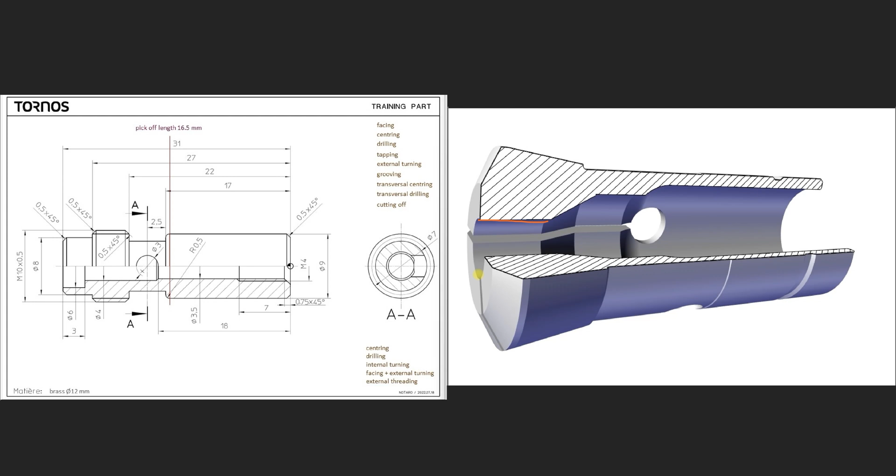Let's analyze the case presented in this right drawing. Here we have a bar already turned at some distance, and later the not turned length is left. This situation is correct because you see that all the time the bar is supported here. But we can imagine also a situation like in this drawing. Here the length of turned diameter is longer and a bar is retracted in that way that collet doesn't support a bar. This is a wrong case. We have to avoid it.

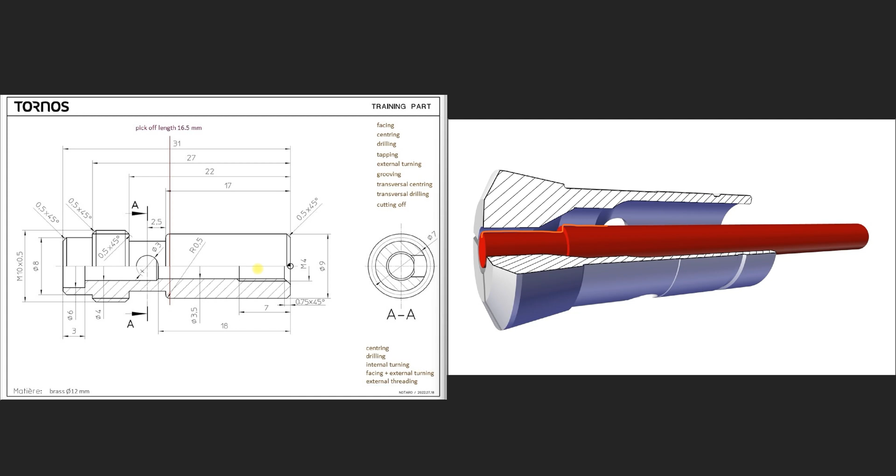We should keep this principle of supporting of a bar in guide bush, especially with operations with multi-passes. When a bar diameter is already turned, it shouldn't be retracted to a position like shown in this drawing that it isn't supported in collet. Returning to our drawing of our part, please notice that we have here in main operation a long hole, and it will be drilled in many passes. During this operation, a bar all the time should be supported. It means that it is necessary first to machine this hole and only after it make external contour.

But one remark: before we start machining of a hole, we will make facing first, not to have burrs inside. And of course, just after facing, we will make centering. We will use spotting tool to make here a chamfer. We need this chamfer to guide the drill and also for tapping operation. And centering will be followed by multipass drilling of diameter 3.5. We'll finish machining of this hole with tapping operation when an internal thread M4 will be done.

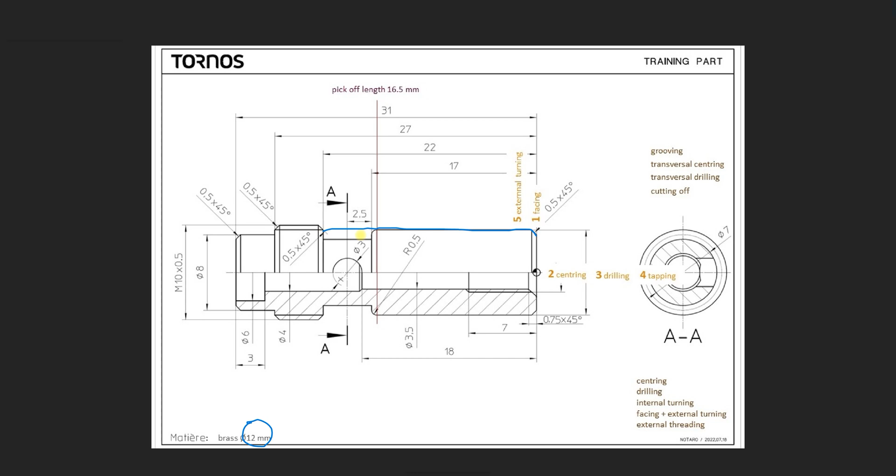Having the hole finished, we can deal with the external contour and turning it. First, please notice that our bar diameter is 12 and we have to turn it to diameter 9. We can make it in one pass without any retracting of a bar. That is why we can continue this turning till the end of the groove. And of course, grooving will be the next step. Within this operation, we will machine this round, groove, chamfer at the end and continue further.

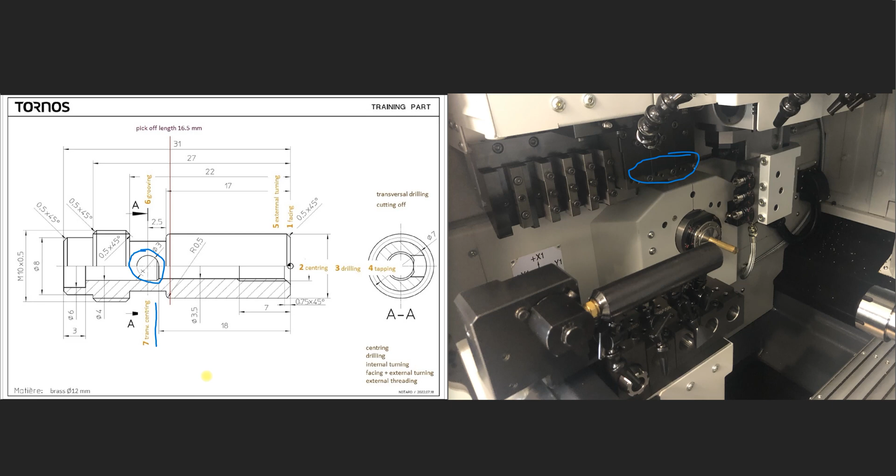We have a radial hole of diameter 3 on a groove. To do it, we need rotating holders; we have them in main operation here. Drilling will be executed on cylindrical surface, not flat. That is why we will start first with centering. And of course, next step will be drilling, transversal drilling. The last operation to execute in channel 1 is cutoff. It will be done when we finish machining in main spindle.

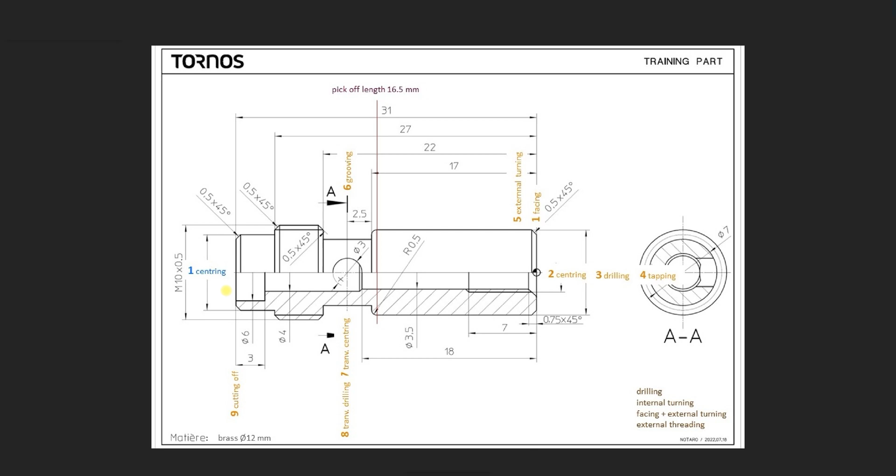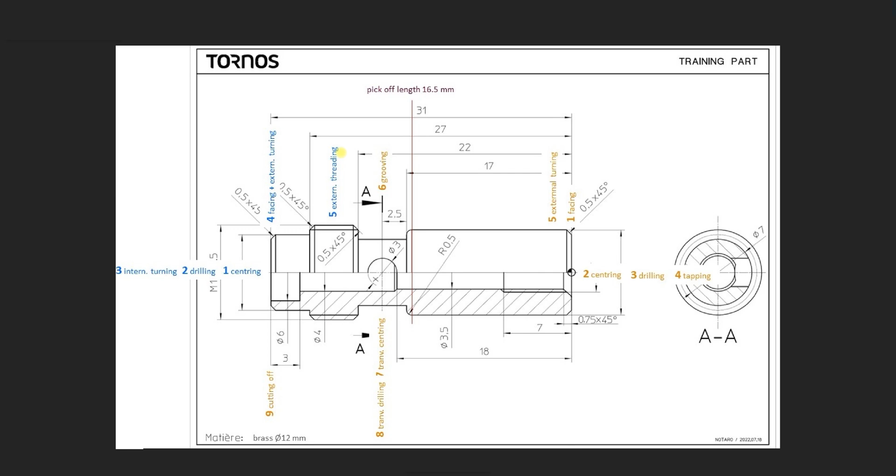Let's now focus on back operation. We will start machining with this hole, and our first operation will be centering. Next step, surely drilling of diameter 4. And the last step will be internal turning. We will turn here this diameter 6 and also make flat step here. We will continue with turning of external contour, this one, but first will be done facing and only after it external contour turning. We will finish our part with external threading executed in back operation.

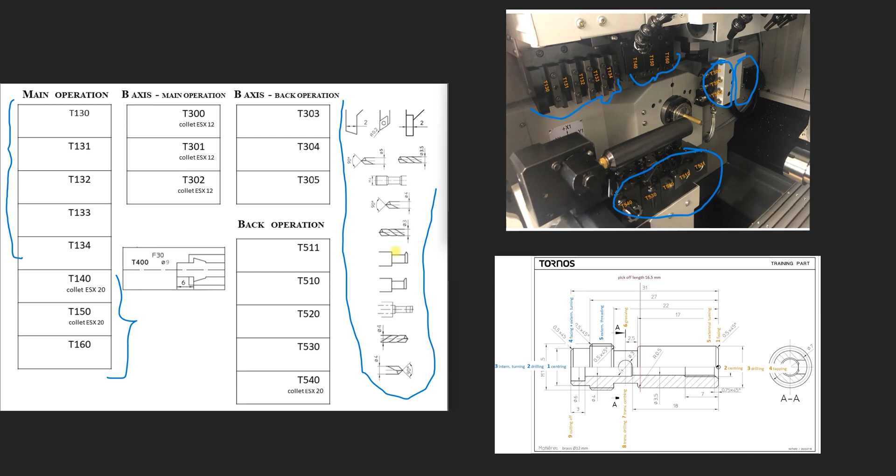Our task now is to assign each tool from this list to specific position on our machine. It is easy to assign cutoff tool because this tool has a fixed position on our DT26 HP machine. This is position T130. Please notice that when this tool is in the center of a bar, then this whole gang is retracted to the right. It makes free space for back spindle to approach safely for pickoff.

The other stationary transversal tools, I mean front turning and grooving, to assign in channel 1, will work one after one. That is why we will place them on adjacent positions to minimize the time of tool change.

Let us discuss now longitudinal tools assembled on B-axis to make a hole. Tapping tool should be placed on the top of B-axis because of better rigidity. And the other longitudinal tools, centering and drilling, should be placed in the order of their work. First will be centering tool, that is why it will be placed at the bottom, drilling tool in the middle, and as we said, tapping tool at the top.

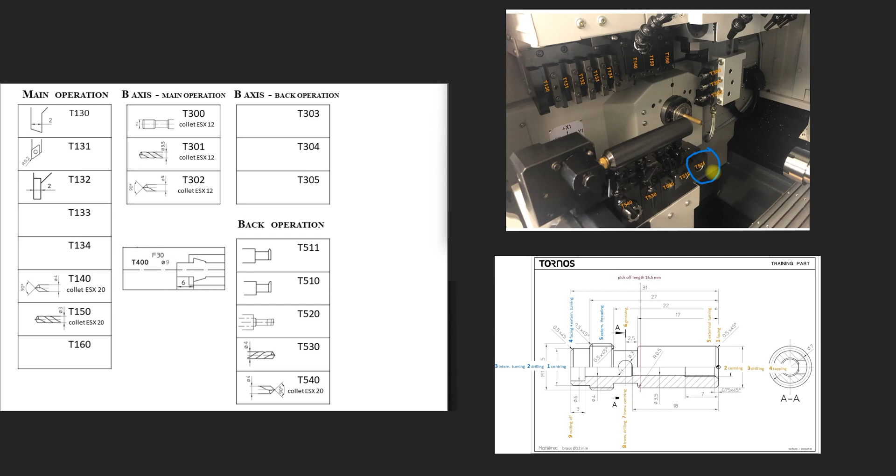At the end, we have to assign the last two tools to make external contour and external threading. First, let us discuss threading. This is multi-pass operation, and at the end of each pass there is retraction and return to the start point. In this case, it would be better to place this threading tool on the right outermost position, it means T511, to have enough space for back spindle to execute all these returns and passes.

And in this situation, we have the only one free position for external turning. This is T510. So, all tools are laid out.

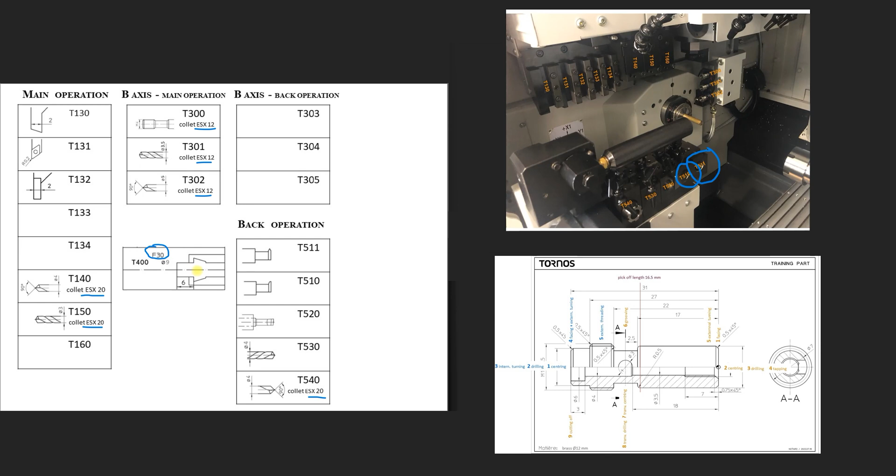And now please notice that there is also the information about types of collets for driven tools. They are ESX20 and ESX12 for all tools assembled on B-axis. The standard type of collet for main and back spindles is F30. And of course we will use this type of collet of diameter 9 for back spindle to execute pickoff and machining in channel 2.